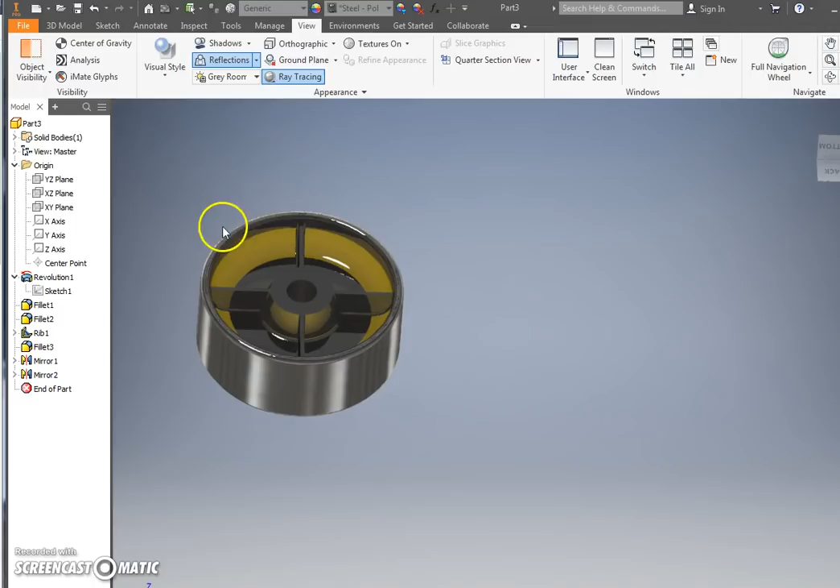Alright, so we're going to make this rim thing right here. So press File, New, Standard.ipt. Ready to roll. 2D sketch. XY plane, sitting pretty as a kitty.

So the first thing you have to do is base this one mainly on the mirror and the revolve tool. You need to learn when to do something in 2D and when to do something in 3D. When you do that depends on what you're doing. It's all based off experience, boys and girls.

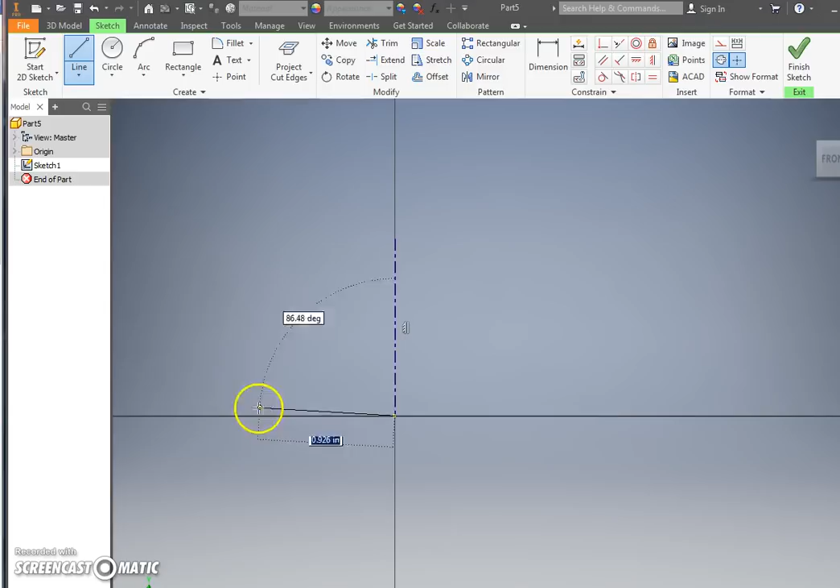You'll figure it out. So I need to draw a center line first. Why? Because it's easier to mirror and to detect a mirror when a center line is being used. How big do you make it? It doesn't really matter, I'm going to make it about 1.5 inches each. Here's where we go, boys.

Turn off the center line, please, otherwise when you start your next drawing you're going to see it and it's really annoying. So here we go, click line. It's very important for this first one that you click on this line, that way your mirror works fine.

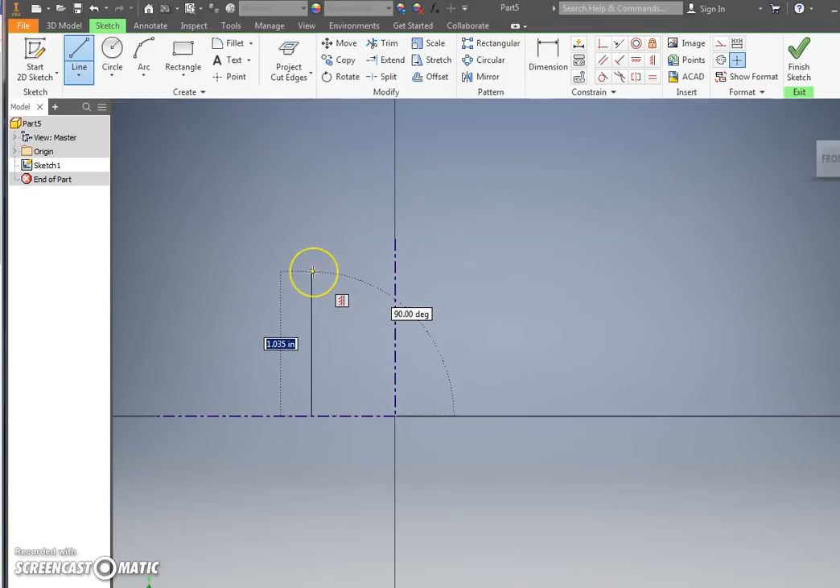I'm going to go up here about 1 inch. There we go. I'm going to go over about 4, actually I'm typing this one in, 0.4. Draw an angle, doesn't matter where, just make it around 125, okay?

Go out here, do not type in a measurement. I know you want to, don't do it. Click there, go up, click above the other line. If you click right here it'll lock it to this height. You don't want that. So I'm going to go up here.

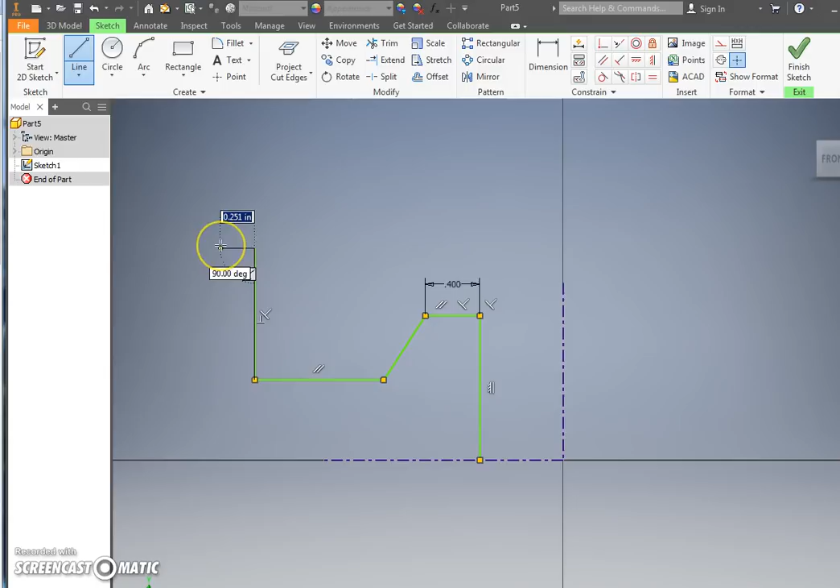This one I am going to do 0.25, and then go down to right here. I don't think it's going to be a problem that that's not touching a certain line, but we'll see what happens. If you're worried about it, you can probably extend this thing out. There we go, now I'm happy.

Now everything's lined up perfectly. Okay, so these are the only measurements you have. In fact, erase this one because I just remembered you don't want it there yet, sorry about that. So this is what you should have prior to doing your first mirror.

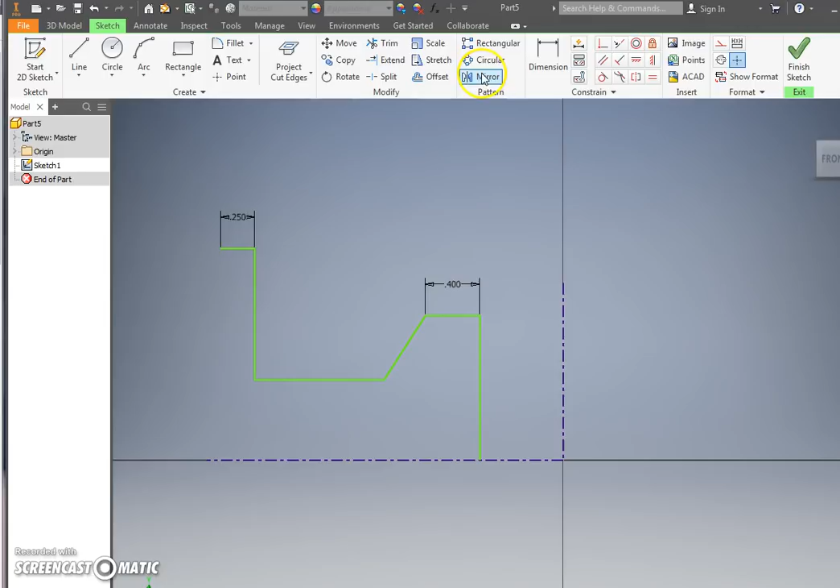Click mirror, highlight all this. Mirror line, choose a center line. Press apply, and done - this will create a mirror. Now, just like looking in a mirror, it reflects everything it does on the opposite side. You move something, it moves it all. It's kind of cool, actually.

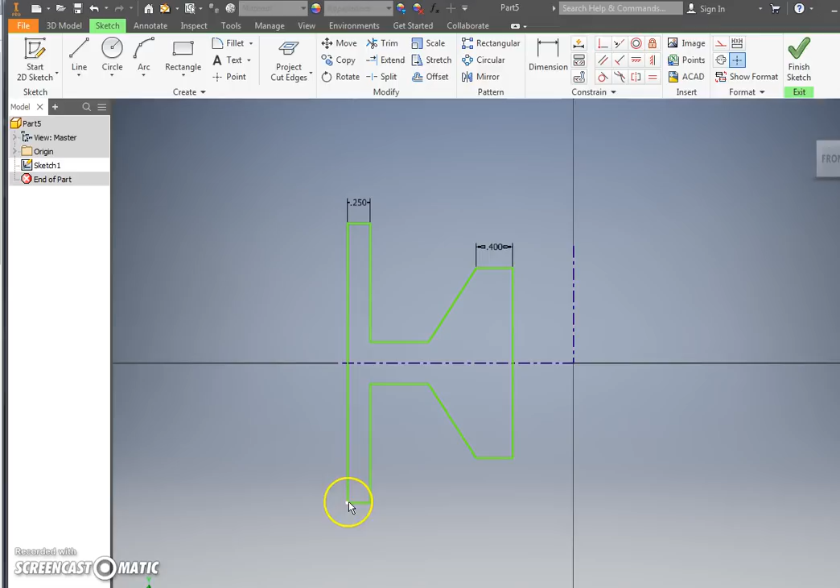Next, now I'll draw this line. I want this to be a complete line. Why? Because I decided to, I want to just show you guys stuff. Okay, more dimensioning. You're going to hate dimensioning at the end, but it's kind of a part of life, boys and girls. You got to know how big things are.

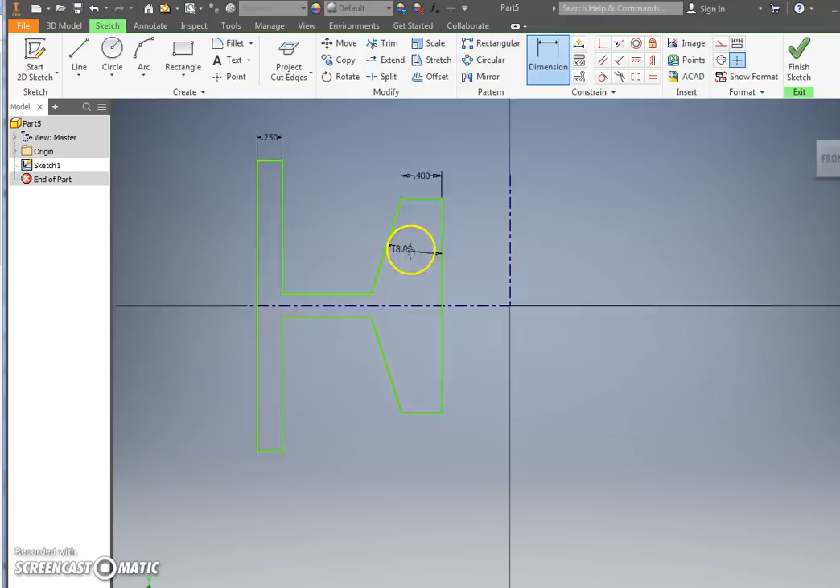I'm going to click this line here and this line here. Mine says 33.2, yours may say something else. Make it 18, please, it's going to kind of line this up a little bit. The next thing I'm going to do is click from here to here and make this be 0.75. Okay, this is going to be the middle of my cylinder.

Choose it again, I'm going to choose this dot here. Choose this line here, okay, make that 2. See, it's starting to line it up now. The last one I'm going to do is go from here to here and make that 5.

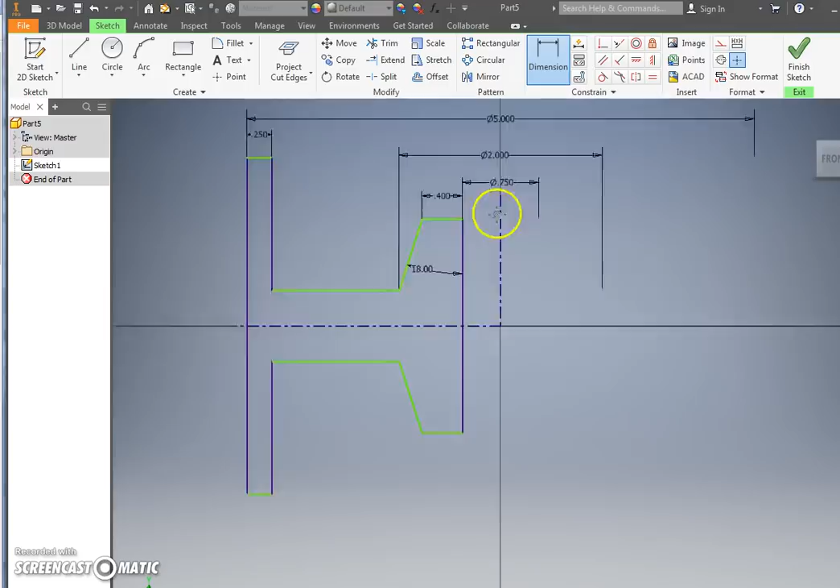Okay, now my widths are set. I still got to set these, I'm not done yet. So I'm going to click this line right here. This should say 2.

Click this line right here. These 2. This should be 0.25. It's a really easy way to dimension. As you see, it helped adjust the rest of it so all the stuff is locked in.

This is what you should have. If you don't have this for some reason, call me over. I will help you out, or try to at least.

Never a good idea to fillet it here because then it's going to affect the other things in not a good way, and you have to make changes. It's annoying. So try to use fillets in only 3D. Stop it. Don't do it any other way.

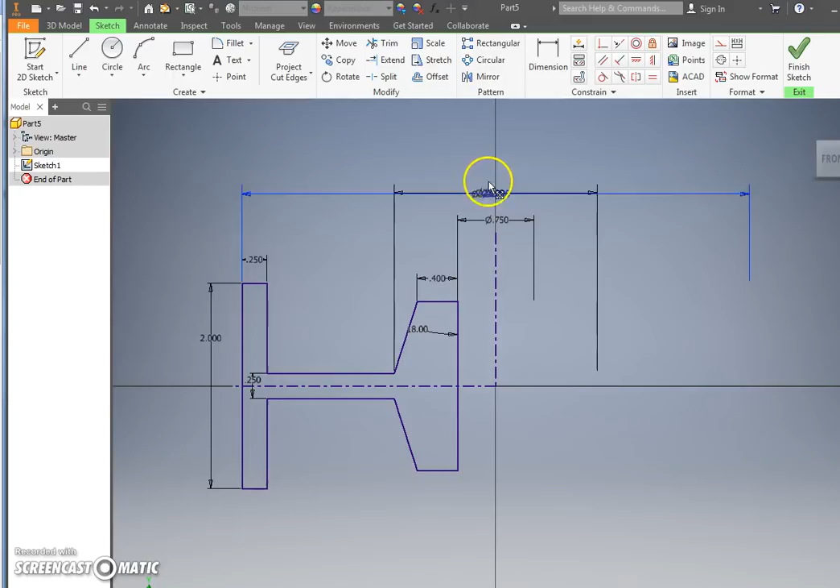Okay? I'm just going to drag this up because I hate it being here. Escape. I'm just going to drag this up because I don't like it just sitting right there. There we go. Okay. Press Finish Sketch.

So next step, revolve. If you did it right, it should automatically see it. If it doesn't automatically see it, you have a gap someplace and you're going to have to go back and redo it. Hopefully you don't. Okay? Press OK. You got your object made.

Shift and scroll. Look around. This is what you've done so far. Okay?

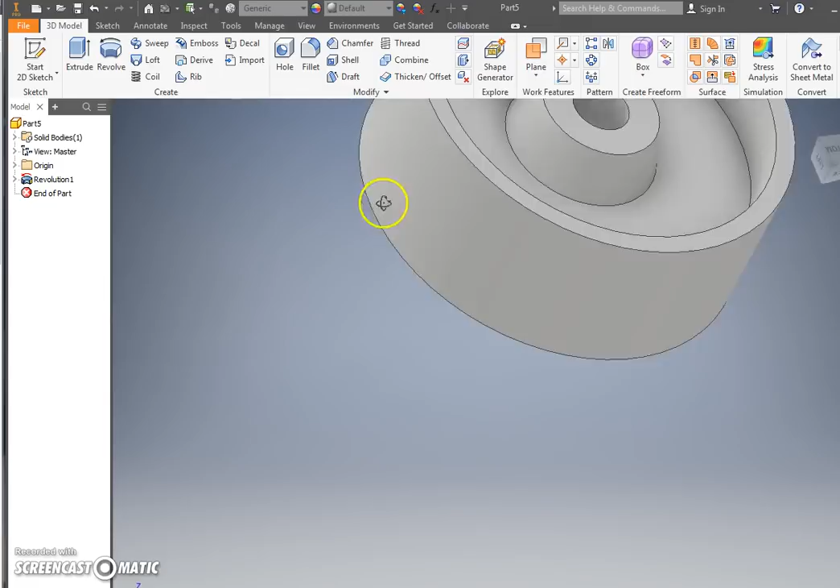Okay, so next we're going to do some filleting. We're going to do 2 different fillets. Your radius should be 0.1. That's going to go on the edge of both sides of the rim and right here. Press OK when you get that done.

Okay. The next fillet you're going to do is a 0.6, and that's on the inside of the rim right here. Okay? Press OK.

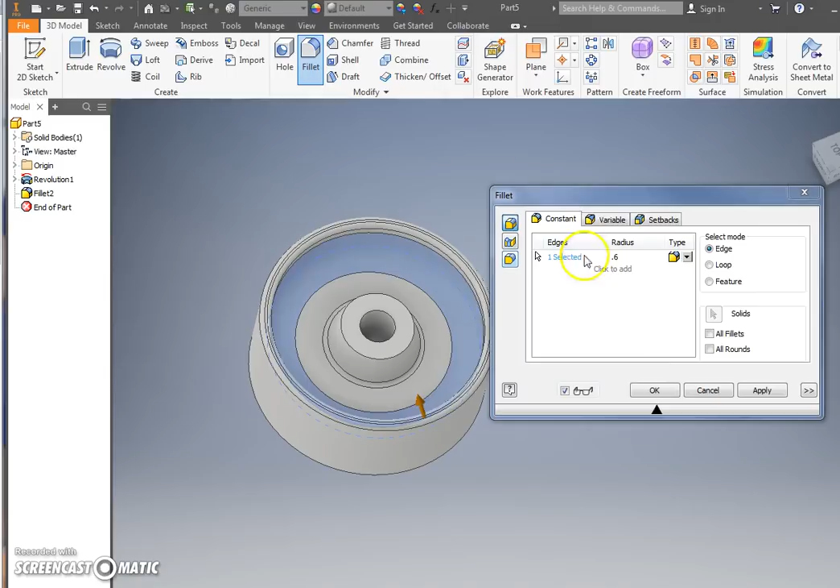Now we're going to do some mirroring. I'm going to do more mirroring than the video really called for because I want to. I am going to click this guy right here, and I'm going to change him to a different type of material just so he stands out more. And I want to choose a glossy gold. You can choose your own. I could really care less. That's like what I'm going to choose.

So next I'm going to do a mirror. Okay, this sometimes is really hesitant on mirroring, but if you have your surface set, you should be okay. Let's see how this works out. So choose mirror. I'm just going to choose on the commands in the project browser. I like doing that more than I do just clicking the individual objects.

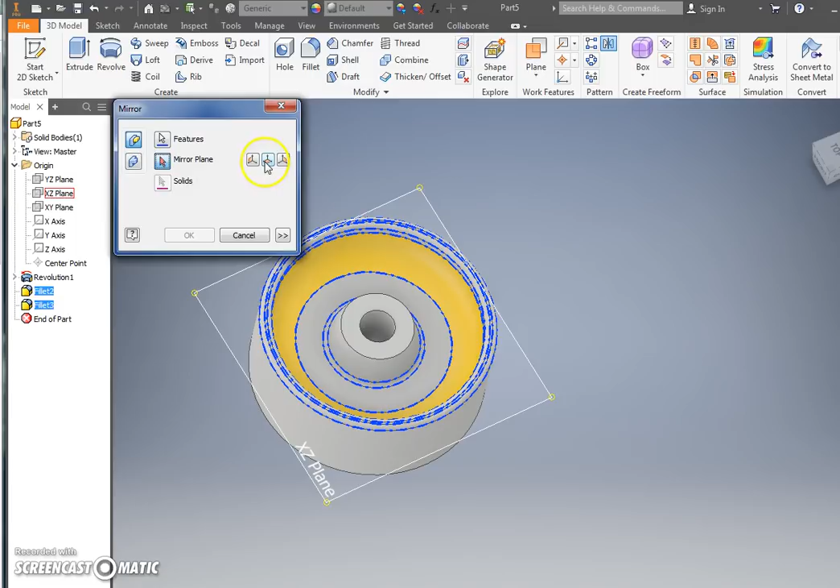Okay, expand down the origin tab. You're going to click mirror plane. Now a new feature here I just saw are these. Now the one thing I don't like about these, it doesn't give me a preview. But if I hover over here, I can see where I'm at. So if I'm not sure which plane I'm on, I'm going to click under the origin. If I know where I'm at, I can click that one right there. But I don't know for sure. So I'm going to click that.

If I look at the bottom here, you'll see a preview. It looks good. Press OK, and I got my stuff. Now it didn't mirror the material. I was wondering that. I may have to reapply it. Not a big deal. Okay, so that part's done.

Next, we're going to add what's called ribs. Learning ribs, I think I got it down finally. So I'm going to click on the face here and do a new sketch. Make sure you're on this right here, not these. So this flat face right here, okay?

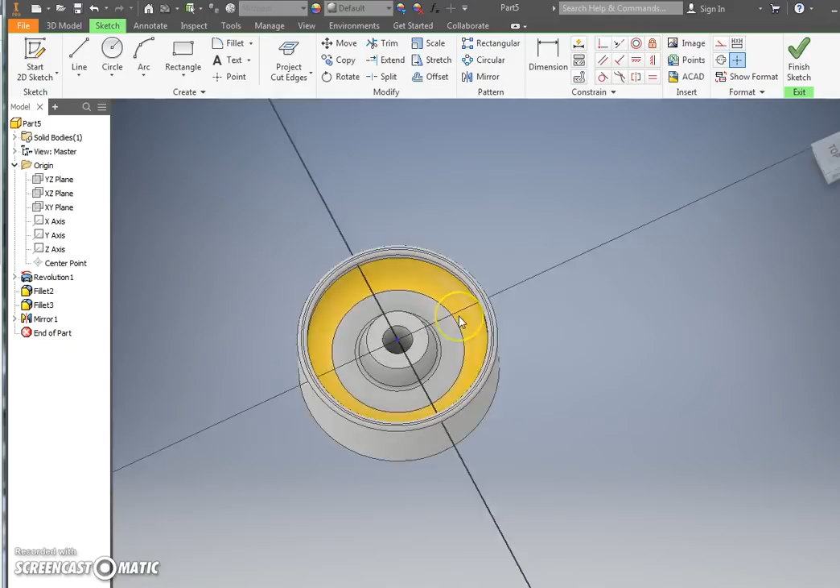Here's what you do for a rib. No, not baby back ribs. Stop drilling on my computer.

Draw a line on these. It doesn't matter how long it is, but draw a line on each. Now to make this easy, if you just press enter, it'll let you actually just go right to the next one. So I'm just pressing, click, I press enter, and I'm done. That's all you got to do. No measurements needed. It just needs to know where to make the rib at.

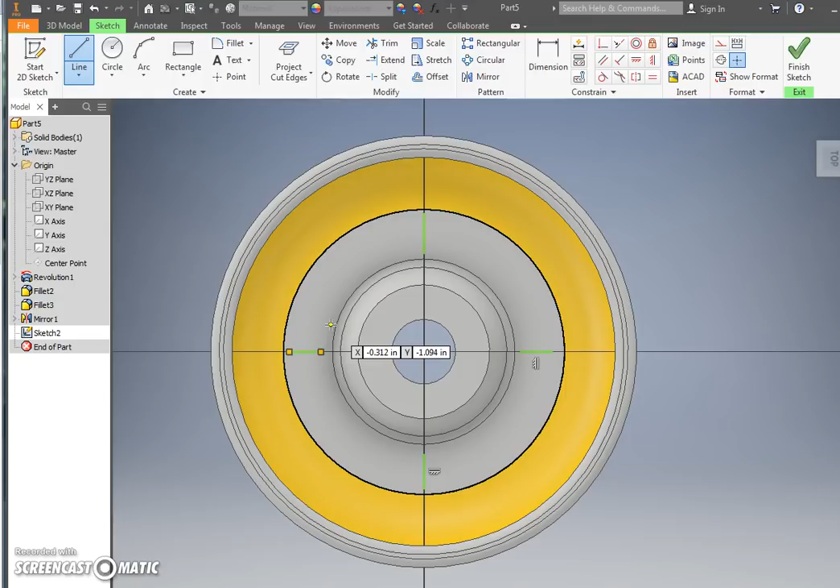I want my baby back, baby back, baby back. Finish sketch. Okay.

Chili's. Okay. Chili's does not endorse this video.

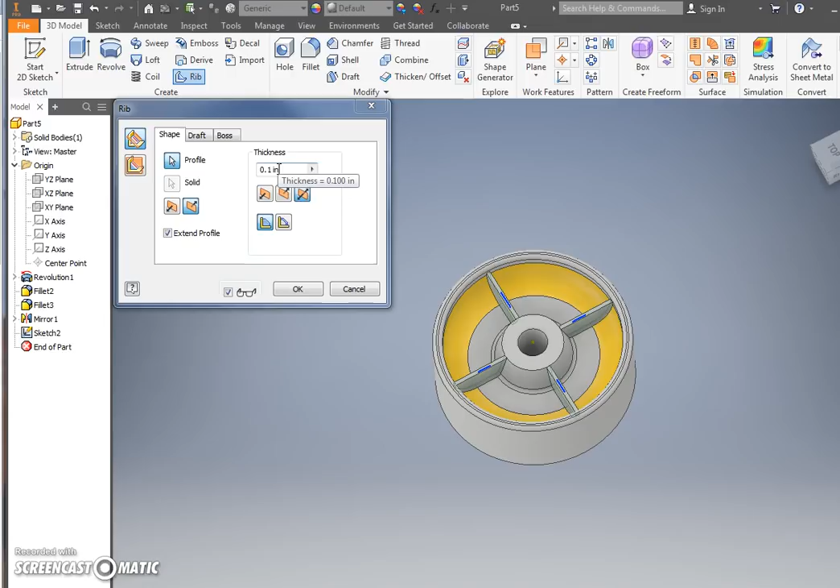Click rib. You're going to click on each of these, and you see it shoots the rib out. Whenever you make a rib, it automatically goes straight down and tries to find the walls around you. You can adjust the thickness, but I'm going to leave it at 0.1. Just leave it as such, and press OK. You've now made ribs.

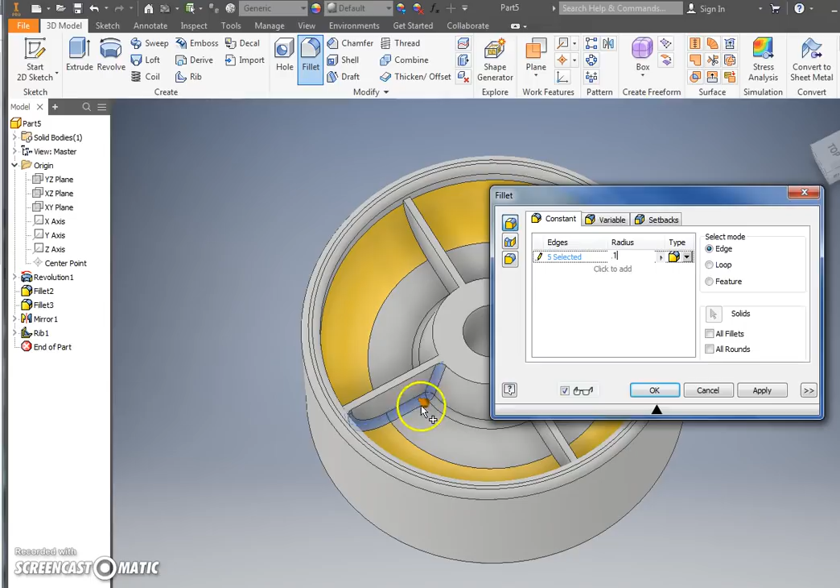We're going to do some filleting on the ribs now. Fillet. We're going to go 0.01, I believe. Nah, I like 0.1 again. That's fine, 0.1 for all of my ribs.

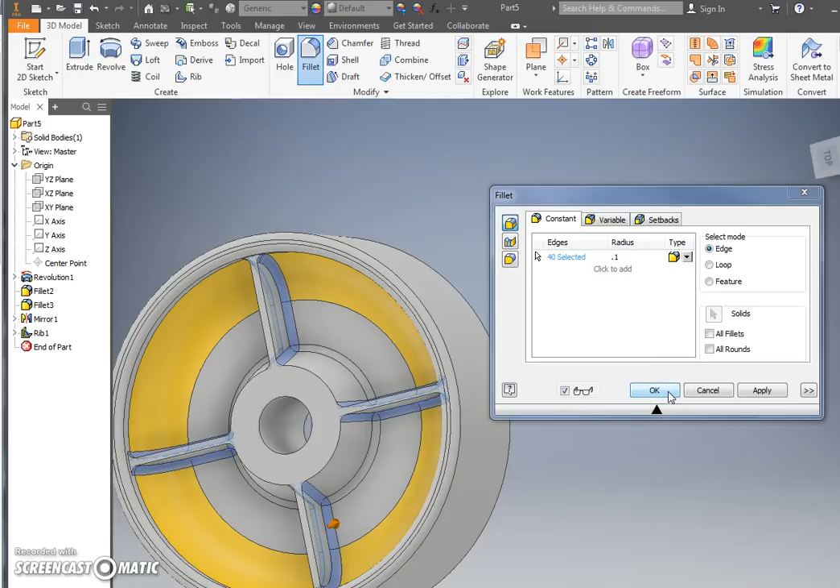Now you may be thinking, this is really tedious, Voith. I don't want to do this on both sides. That's why the mirror command comes in handy, folks. It's going to help you save a lot of time here in the end. So go ahead and put a fillet on all 8 sides and press OK.

Alright, so we're going to mirror. Now, Inventor doesn't like it when you mirror a fillet with an object. If you try to mirror both your ribs and your fillet at the same time, it won't do it. Try it out, if you get lucky, great, but I doubt it's going to work for you.

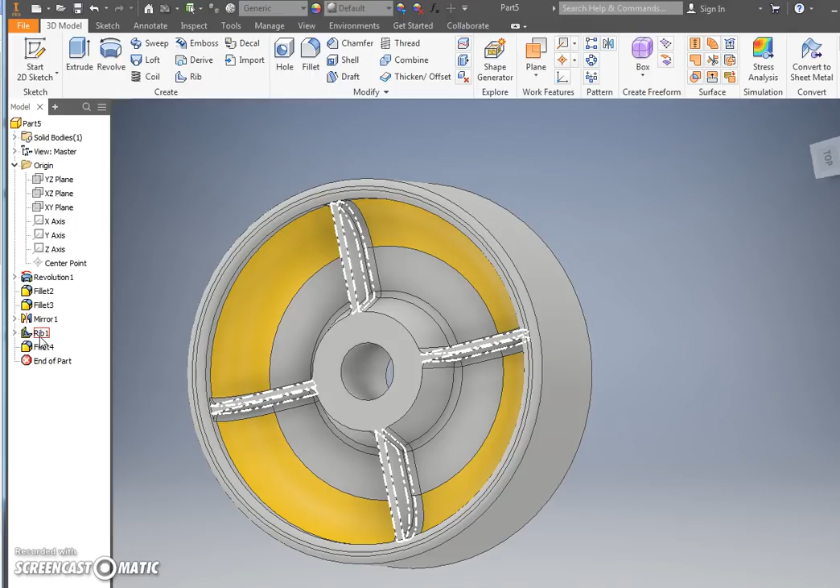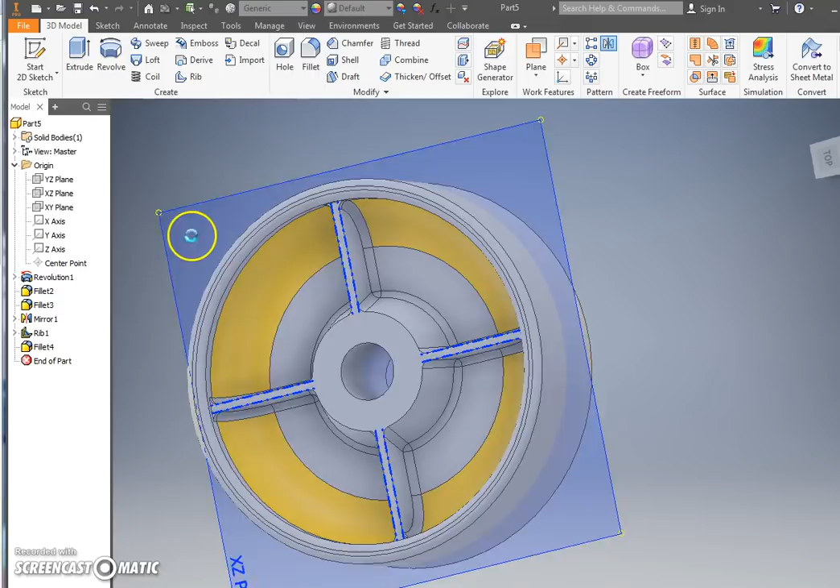So on this one here, we're going to do some mirrors. Click mirror. Just lost mirror, there it is. It's under pattern. First thing to do, click my rib. I know where I'm going with my plane, I'm going to click that plane. Pops it up like that. Press OK. If you got an error, you got an issue. But there's my rib, okay.

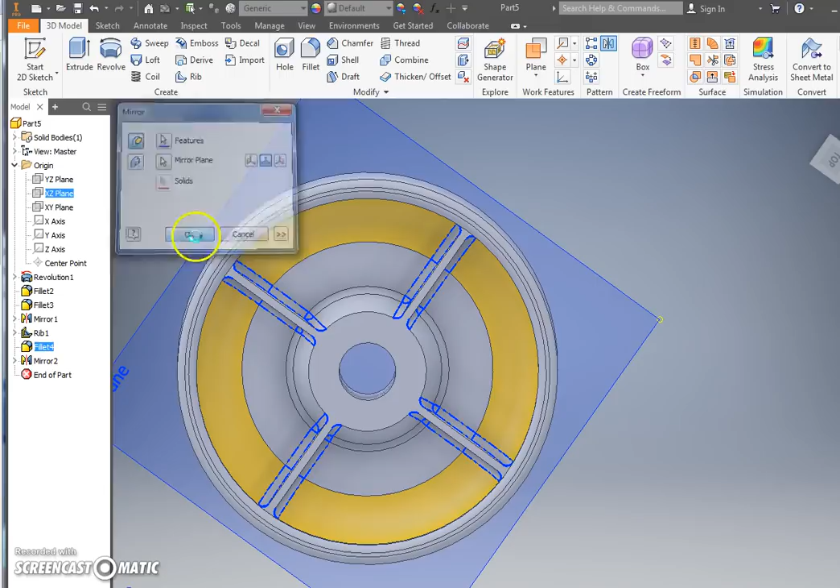Nice. Next, I want to do fillets. Well, same thing, mirror one more time. I'm going to click on my fillets, going to click my mirror plane here. It's OK, now I got them on both sides.

Cool, huh? Okay, your object is done, but I want to show you a little bit about the Visual Style here. So if you go View, you see you get some different objects here. Under Visual Styles, you have some things that you could do to make this thing a lot more vibrant, make it pop out, that kind of stuff, okay?

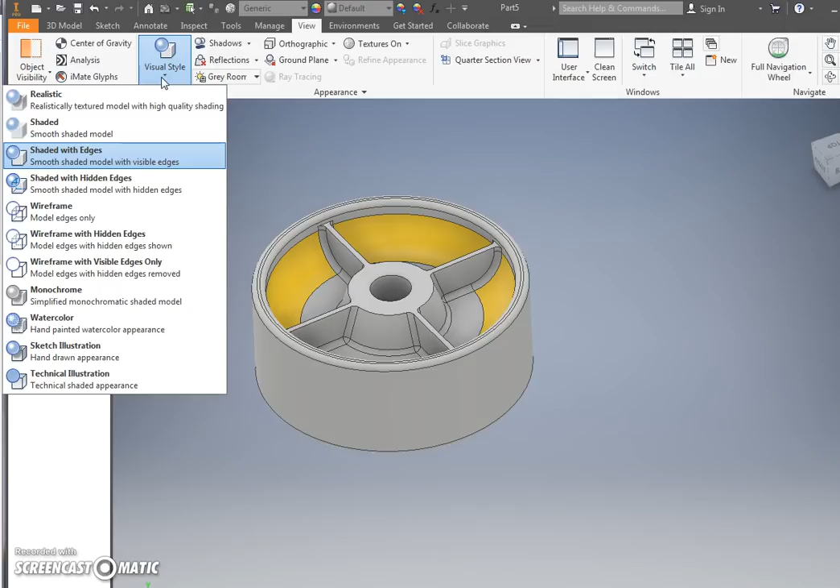You can do realistic, go ahead. It'll add some colors to it, it'll add some smooth edges to it, okay? Ray tracing is kind of cool. If you go ray tracing, it'll make the object you have created look more real. There are different levels of it.

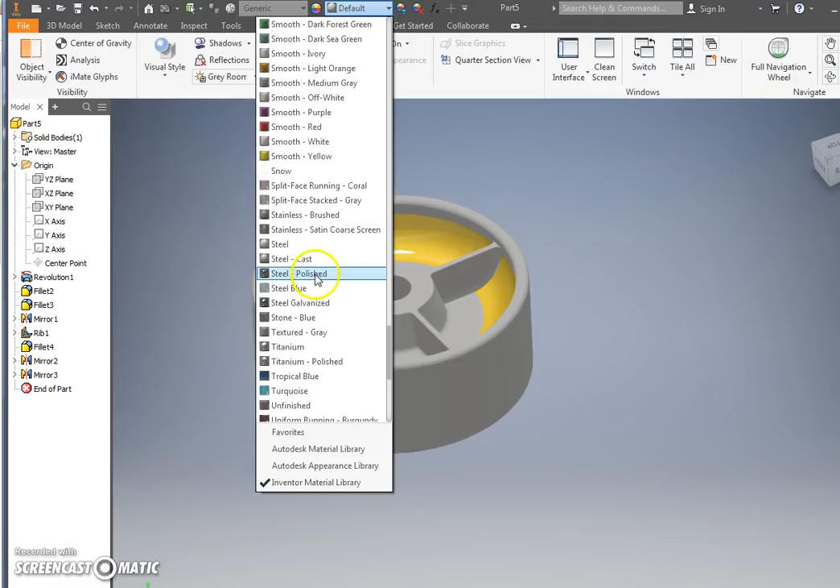One thing I like doing also is I'm going to change my material to something a little bit shiny. I know there's a shiny metal down here or something like that. Polished. Steel polish, let's do a steel. Ooh, look at that, that's a nice polish.

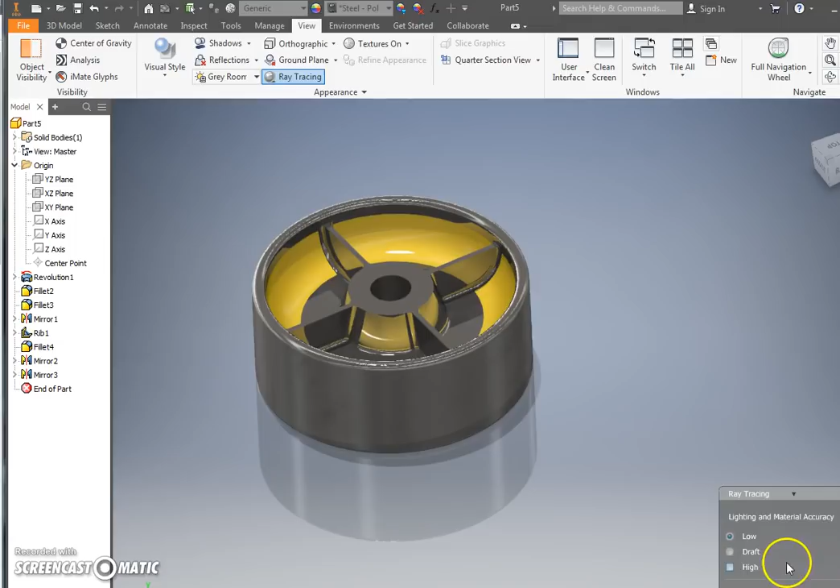You can do some reflections, give you a little nice reflection on your floor here. Okay, shadows look good, all shadows. I want to see shadows in this thing. It's looking more realistic, doesn't it? Okay, it's on low, let's see what high does.

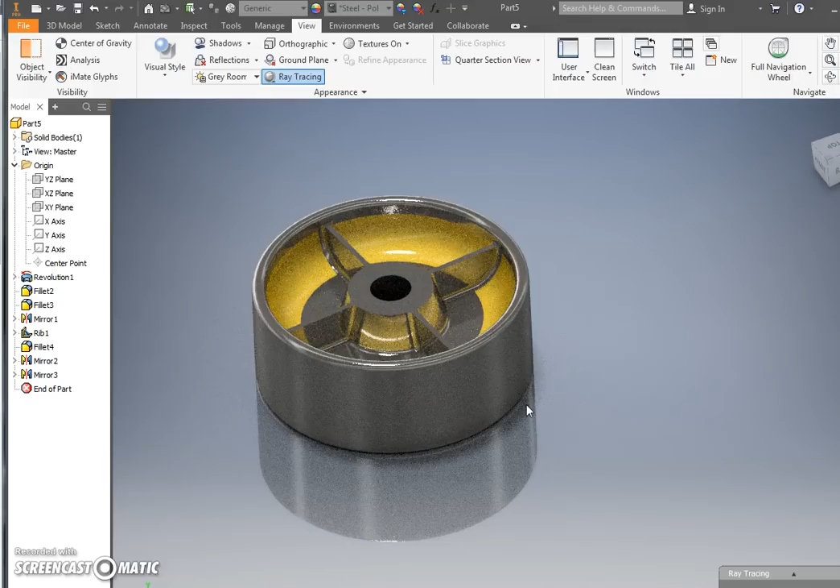Now, you never want to work like this, it would not be fun. I'm probably not going to let it go all the way through the ray tracing because it's going to take a while for the video. But as you see, it really brings out the detail in your object. It makes it look real. All the fillets are gone, all the weird coloring is gone, and it looks like it should.

So when you get done with this, you'll see your ray tracing thing down at the bottom here. This is, there it is. Mine's still going, it probably has a while left on it, but I'm not going to wait. I'm just going to go back to low here.

Okay, once you get done with this, save this and show it to me. I think it looks neat, I think it's really cool. So you did well on this one, guys.